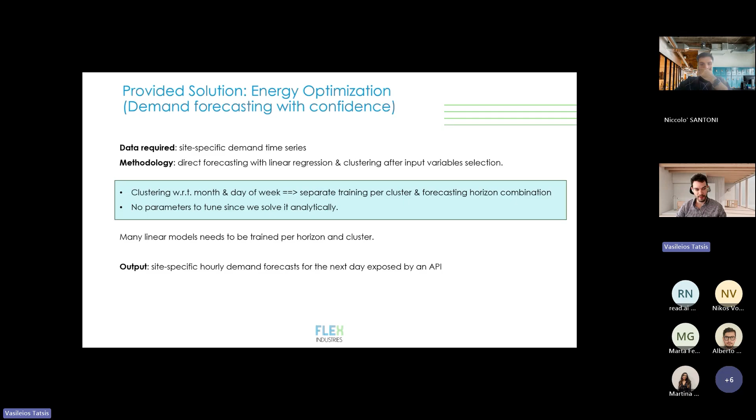And this is the analytical way of producing the forecast, and the simpler solution, because we have many linear models that need to be trained per horizon and per cluster. And in combination with this forecast solution, we have also implemented another more sophisticated solution using LSTM networks.

The LSTM networks belong in the deep learning algorithms. They're called long short-term memory networks, and these networks are trying to learn all the patterns that the previous method, the linear models, derived through all the analysis that I briefly mentioned before.

These networks are trying to learn all these patterns from the time series, and for this reason, the parameters of these networks need to be near the optimal values. Thus we implemented a hyperparameter optimization method, and at the head of this hyperparameter tuning method sits a differential evolution algorithm. This algorithm is a metaheuristic algorithm from the optimization arsenal.

The combination of the novel parameter tuning algorithm along with the LSTM provided the forecasted values that we want also for the flexibility. And we have some comparisons between these two approaches. Both of them had really good results. Also, in this approach the patterns and the seasonality are not analyzed by the end user, but we let the model learn all the underlying patterns of the time series data.

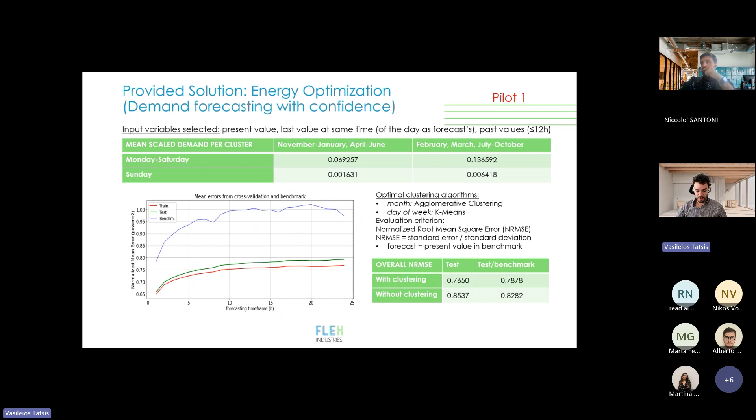Here, the predictions were okay, not so good with the deep learning approach. They were better with the linear regression models. But in some other pilots, we had better results with the deep learning models. Here, we changed to pilot 2. We analyzed again with the linear regression models all the patterns regarding the days of the week, other seasonality patterns and the months. We did specialized clustering of all of this, and we trained different linear regression models.

And the results, for two different rooms and the total one, are here. We have the results with the clustering and without the clustering. And as you can see, with the clustering, the results are obviously better and really accurate for all the predicted horizons that we want.

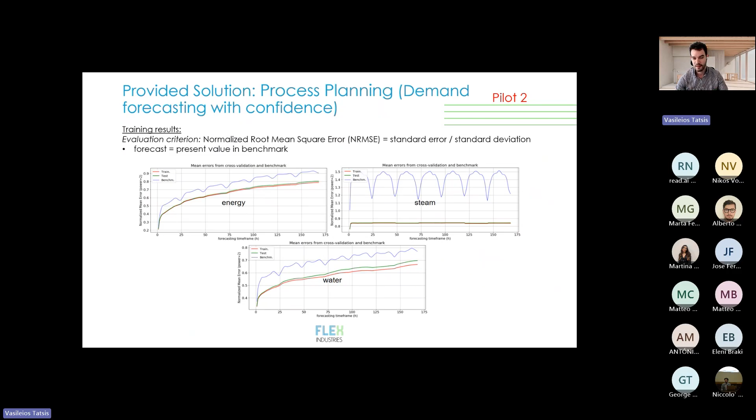For this pilot, we also had to predict various aspects like energy, steam, water, because the load forecasting was a combination of many time series from many pilots of this project. So again, we used the same algorithms, the linear regression models and the deep learning models. We had really good accuracy. Here we see the predictions for the deep learning model, but for the linear regression model, the results are similar.

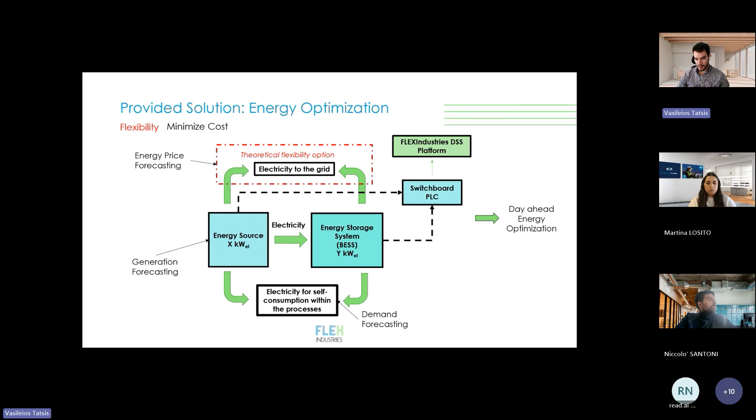Again, here we see the general case of the energy optimization algorithm. I explained it quickly before. We have the energy generator, the BESS system, the grid, and actually we choose all of these energies to self-consume or to buy and sell the energy to the grid.

To sell the energy to the grid, for the moment, most of the pilots are not supporting this option, because there are some regulations that they need to solve in the upcoming months. But when they are able to sell the energy, they will also have some profit by selling the energy to the grid when the demand is high in the grid itself, and we don't want to consume this excess of energy in the factory.

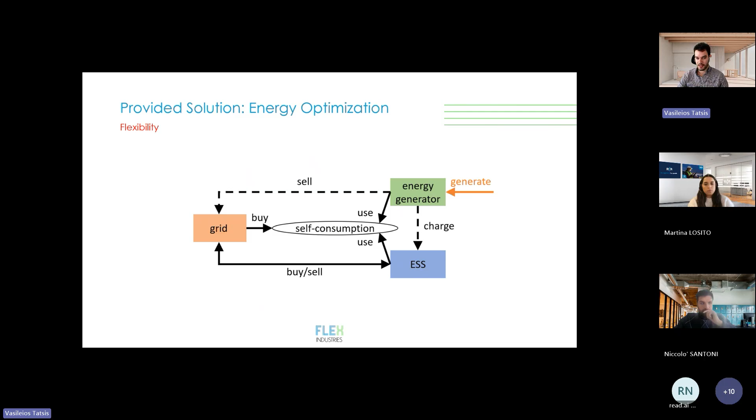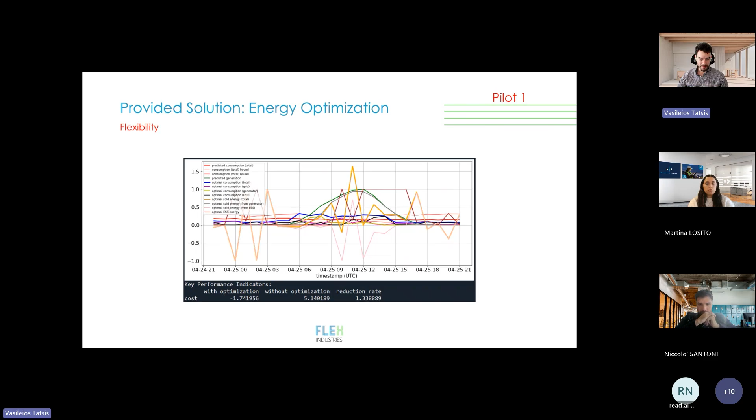Here we have some results for the day-ahead schedules. For example, here we see that in order to cover a specific demand, we need to discharge the battery, or to use this amount of energy from the ORC, this amount of energy from the other system, and so on, in order to cover the demand and minimize the cost or maximize the profit of the factory. It's the same meaning. Again, from another pilot, the results are similar, the same story, where we have the battery and the forecast and the demand as well.

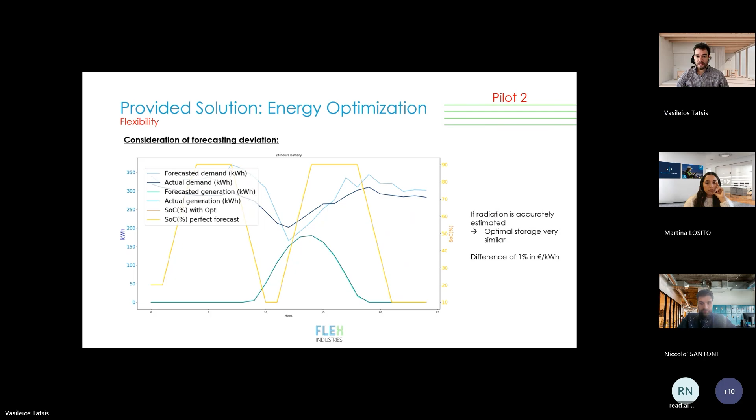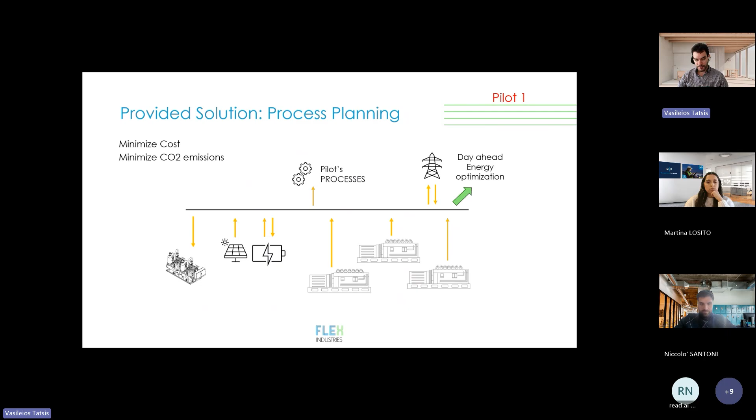And now, moving to the more complicated optimization solution that we provided for the flexibility. In this solution, we wanted, except for minimizing the cost, to also minimize the CO2 emissions, because in some of the pilots we have not only one energy source, but different energy sources, as you can see: the grid, the battery, the PV, and some other specialized machines. And the results that we achieved, even for this complicated situation, were really accurate for some of the cases.

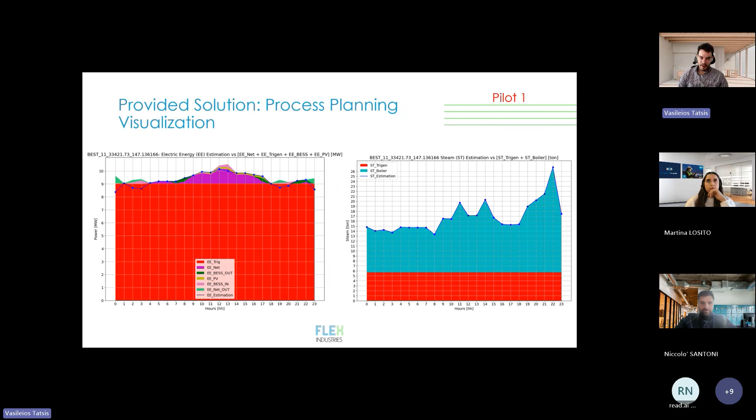For some of the pilots, we had some other problems to solve regarding the mitigation of some penalties that they pay because they purchase more energy than the energy that they want, and usually this action comes along with a penalty because you consume more energy than the energy that you forecast you want to consume. For this test case, we had again two different solutions. This one that I will show you, we eventually developed, but we didn't implement it because it was the most complicated solution. And some of the pilots wanted the simpler solution that I will show you in the upcoming slides.